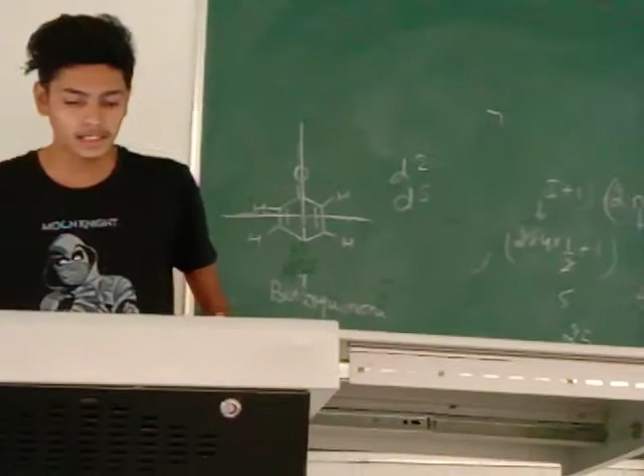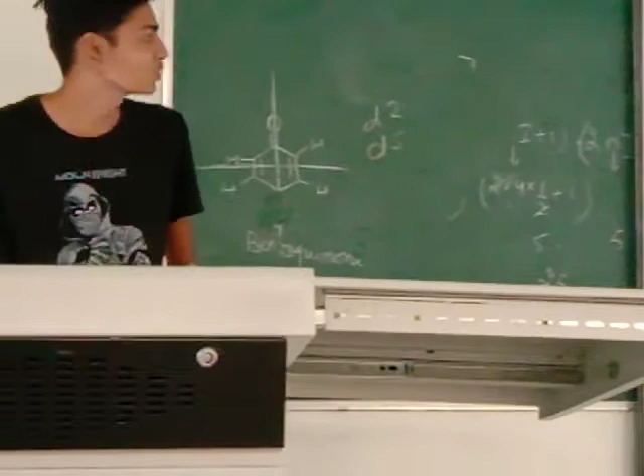Good afternoon, everyone. Today's my topic is wind energy. So first of all, what is wind energy? Differential heating on the Earth's surface and atmosphere causes vertical and horizontal air currents known as the wind. A wind turbine then produces electricity by converting the force of the wind, ultimately charging a generator through rotation of the wind turbine.

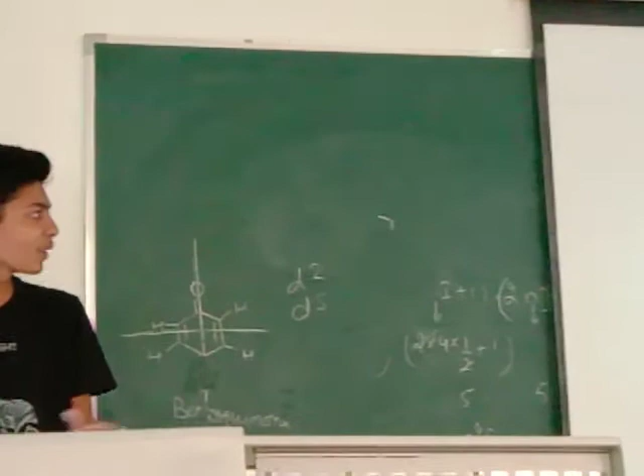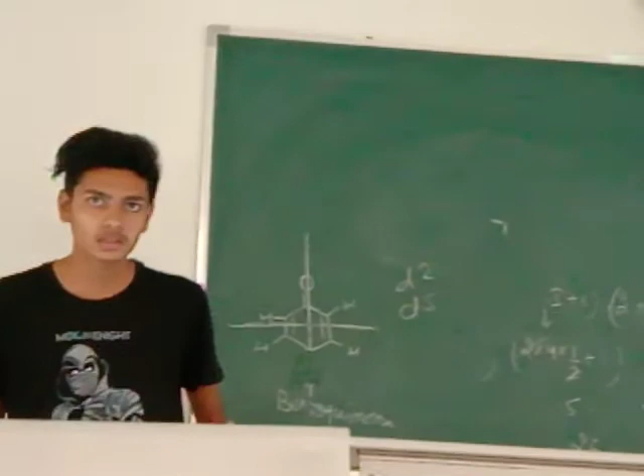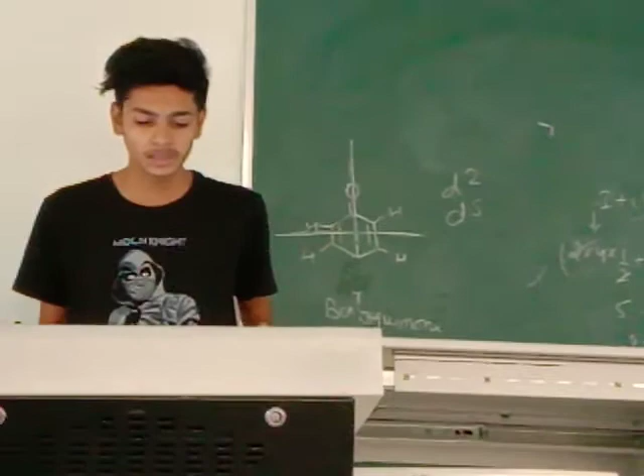Parmar, can you clearly tell us the previous one? Before wind turbine, you introduced wind vane.

See how beautifully Parmar has clearly defined wind vane and wind turbine. Both are same for us, but it's not so. Wind vane is different, meaning windmill is different. The next one is wind turbine, which is different. Have you understood the difference?

When the wind energy that is generated is used for mechanical work directly, for grinding some kind of material to produce oil from seeds, or to pump water from wells for agriculture, they are called windmills. But there is some other device called wind turbine, wherein the wind energy is converted to mechanical energy, and mechanical energy is subsequently converted to electrical energy. These are called wind turbines. That is the difference between wind vanes and wind turbines.

Yeah, thank you Parmar for the clarity.

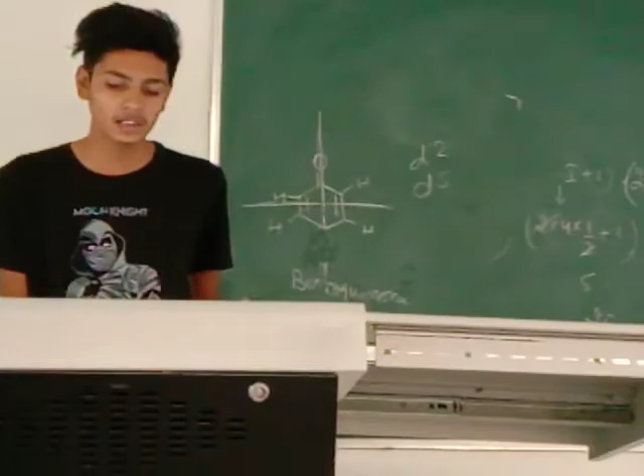India stands fourth position with 5.8% contribution to world's wind energy. That is why I say on every platform that India needs to learn from China. China has nuclear power, China has unconventional energy sources, but still China is harvesting wind energy, using its land and geographical resources well.

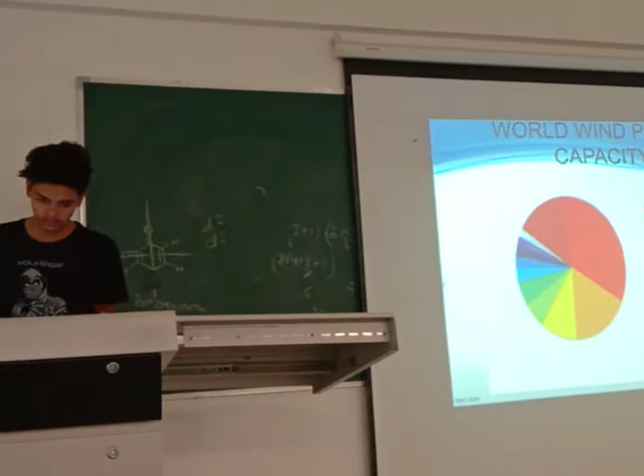That is why we have so much military all around the border of India and China. How is electricity supplied in the border regions? Through such unconventional energy sources. The Indian Defense DRDO has to learn from the strategies of China, especially in the sector of renewable energy, on how to empower our soldiers and make our army stronger near the borders by providing them a sustainable source of energy. That needs to be learned from China.

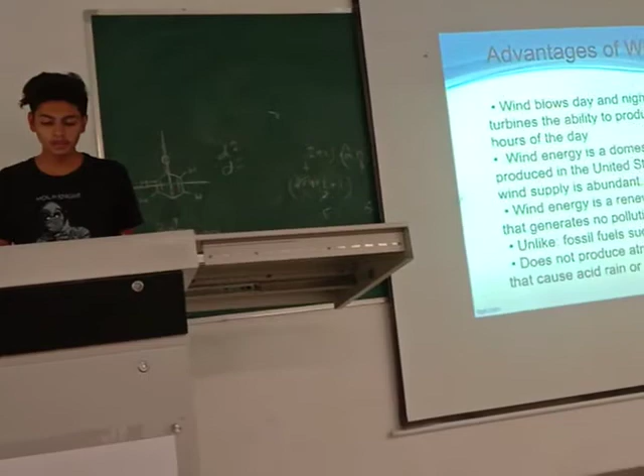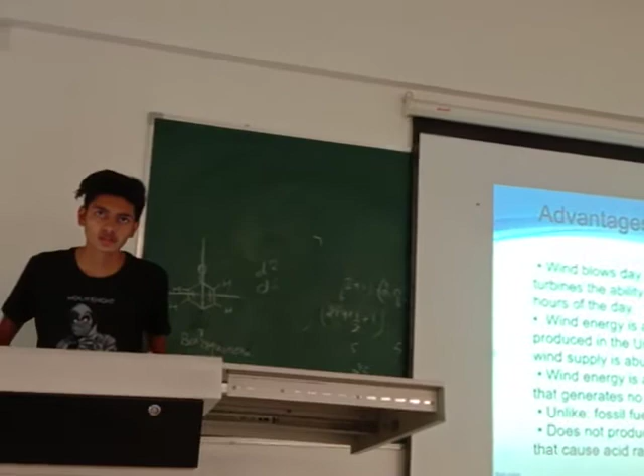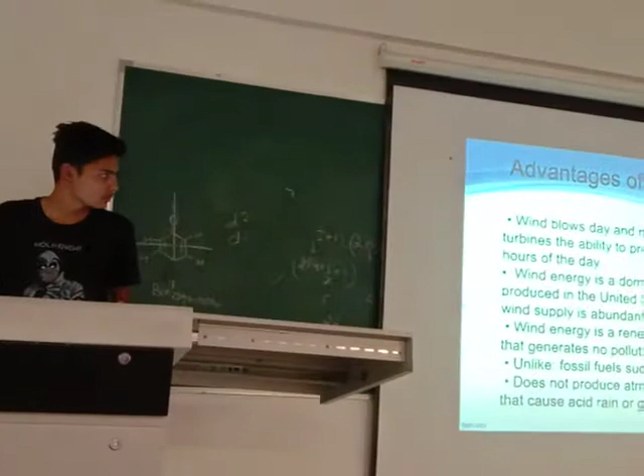Excuse me Parmar, I have an objection here. We cannot say that there is no pollution with wind energy, or with tidal energy. The proportion of pollution is substantially minimized because of reduction in CO2 emissions, but any energy conversion process involves pollution in one way or other, which is inevitable.

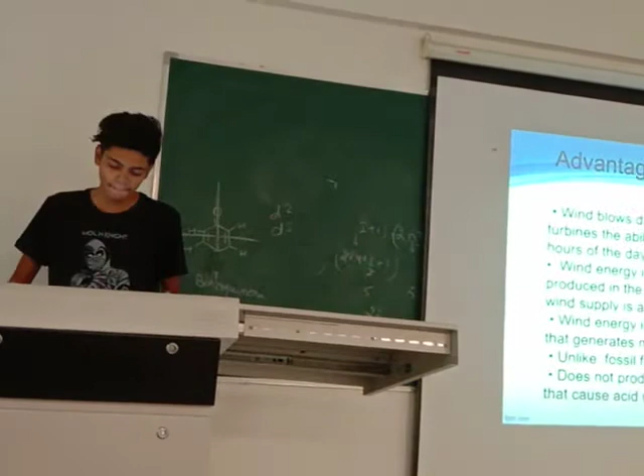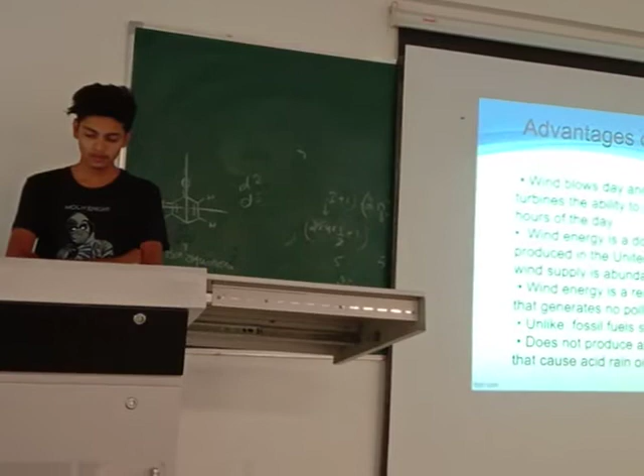According to the second law of thermodynamics, there is no machine with 100% efficiency. Agreed? Carnot's limitation is equally applicable. There is no energy conversion process without pollution. It is as true as the second law of thermodynamics. This can also be stated as a law of pollution regarding renewable energy sources.

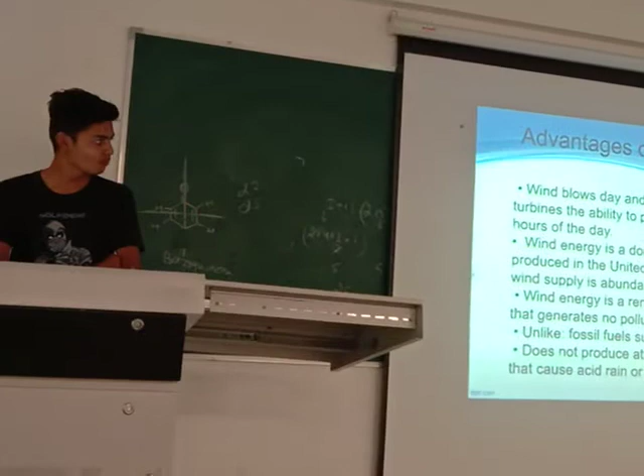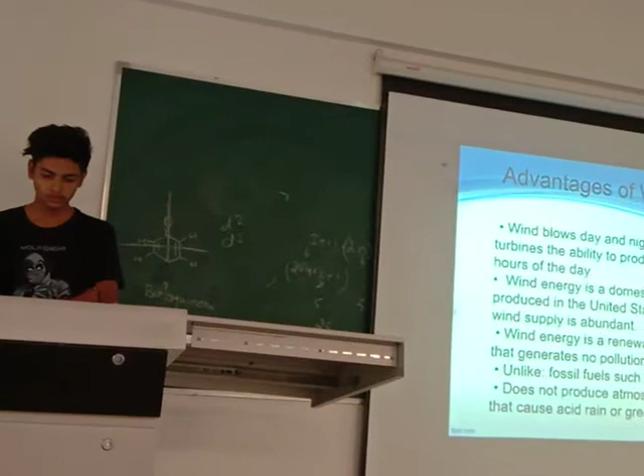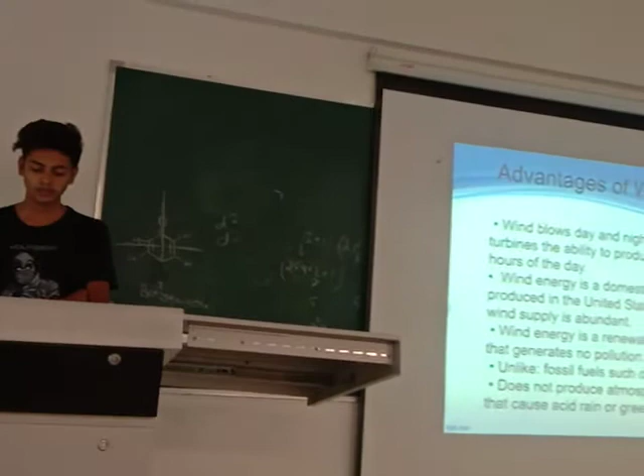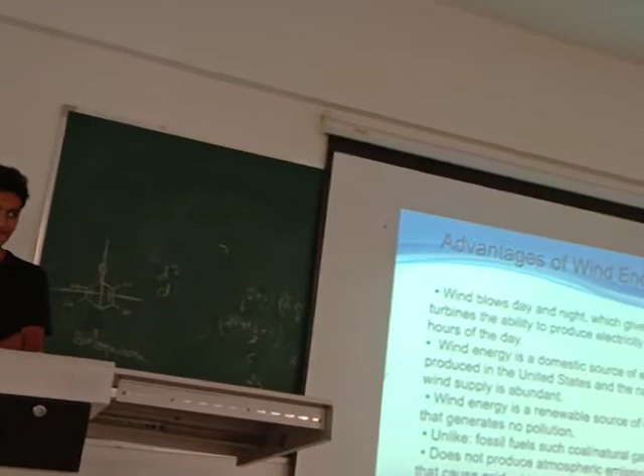We cannot say renewable energy sources are non-polluting, just as the second law of thermodynamics says that there cannot be a perpetual machine with 100% efficiency. Carnot's limitation and Carnot's engines, all those things we have studied - like that, there cannot be any energy conversion process that is 100% free from pollution. This should be underlined. Please go ahead, sir.

Wind energy does not produce atmospheric emissions that cause acid rain or greenhouse gases.

Yeah, but yeah, it's a good lecture. Thank you, Virendra Parmar, for the eloquent lecture. It's very interesting. Thank you for giving us new knowledge.

But I expected many more figures. It is a review paper, the latest review paper from 2022 from Energy Journal. It has a beautiful comparison of how India is performing, how Indian states are performing, what is the relative proportion of contribution from Gujarat. Where are all the figures? Does the paper have figures or not? Yes, but why did you not put all the figures? At least some figures, like the one showing comparison between Gujarat and other states, should be put in.

No, this is the way you have to write the paper, this is the way you have to write the book chapter. When you write the book chapter, you have to include as many figures as possible, especially how India is performing on the world platform as far as wind energy is concerned, and how Gujarat is performing relative to other states. Only one pie diagram is not sufficient. There are beautiful bar diagrams showing that Gujarat's contribution is 21% out of total India's contribution. That beautiful figure is missing.